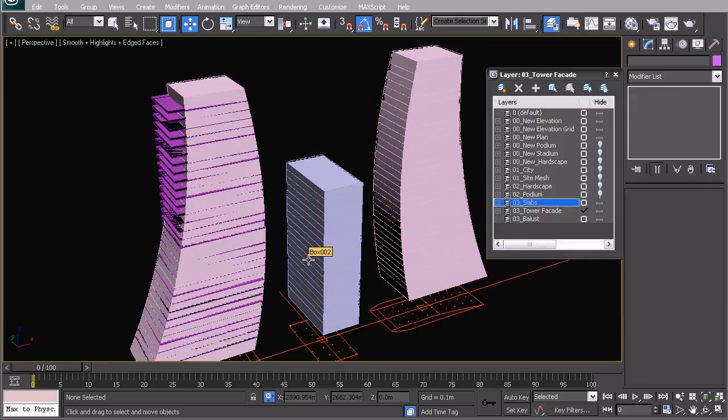So now that we've done the slabs and the balconies on one side, we're going to do the same thing to this building in the middle. In a way, this video is going to be a slight repetition of the last one. So you can skip through it if you feel really confident that you can do all of this quite easily. I'm just going to do it on camera so that you can see the entire process and I don't really skip through anything that's important. So we're going to do it quickly this time.

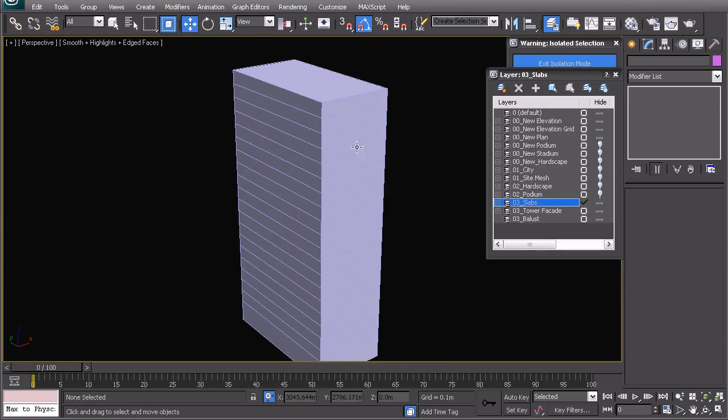I'm going to isolate, select all of the lines. I'm going to select a loop. We're going to create a shape. The only difference is this time the shape is going to be slightly on the outside, so we're going to add balconies to each of these levels. I think it's about 2 meters we can go. We can change that distance later as well if we like.

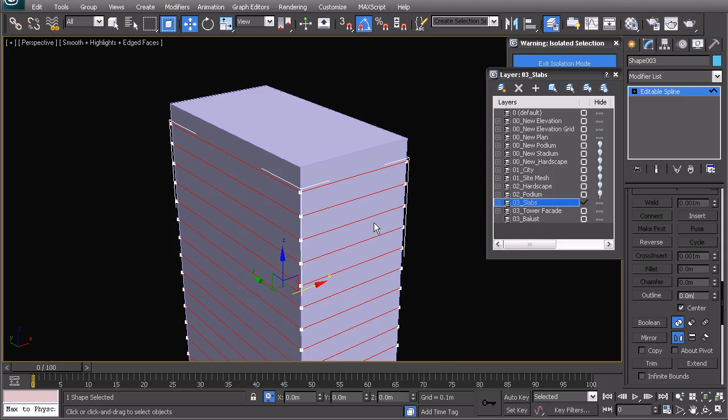There's two ways you can do this. You can either make the slab on the inside as one object and then the balcony on the outside as a separate object. And I'm going to do it that way. It's slightly more complex, but I'll show you why we have much more flexibility that way. So what we're going to do, let's isolate. Just go back down, re-isolate. There we go. We're going to extrude minus 0.25 without the capping.

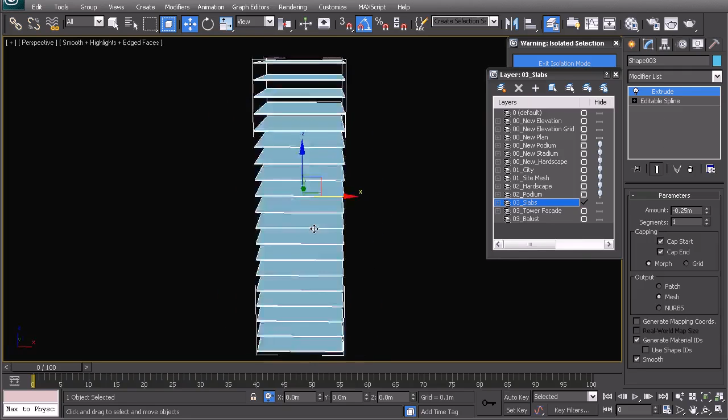Let's just see what happens if we do cap it. You'll see this time the capping worked without any problem because none of these outlines were facing in the wrong direction. Otherwise we'd have to do it the same way we did last time when we ran into that little bug. So what I'm going to do to make the balcony stick out on the other side is I'm going to make a copy of this by pressing Ctrl V, and instead of extrude I'm going to do a sweep.

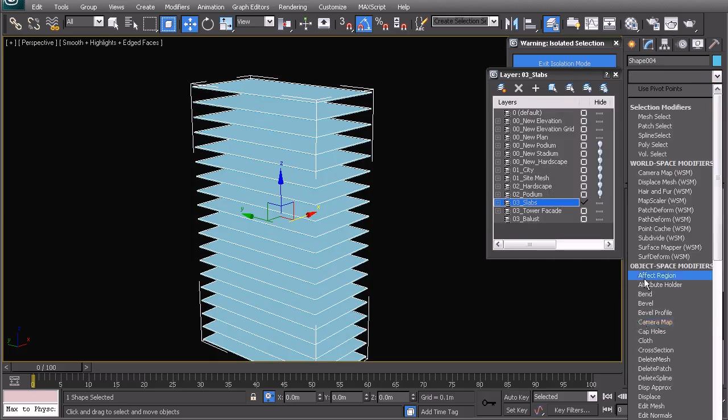Now let's zoom in here so we can see what's going on. The sweep is going to have a bar, so that's correct. Then the distance here we will align it slightly differently so it's in the opposite corner. And this distance here is the depth, so we're going to do 0.25, so it's the same as the balcony, same as the slab. And then this part here is going to be the width.

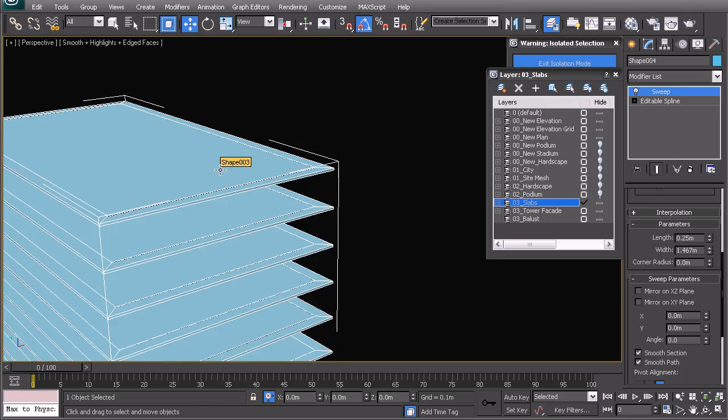And the reason why this is fantastic is with one parameter being this width figure here, we can adjust the width of the entire balcony on the whole building. So that is much better than going back into editable spline, then creating an outline and doing it that way. So this way we don't touch the slabs on the inside, we're just focusing on the lines on the outside. So let's say we're going to choose 2 meters.

We can then go to the step where we want to make the balustrades. Now we can do it two ways. Either we can add an edit poly modifier and then select all the edges and then create a shape out of that, or we can use the same shape, press Ctrl V, copy, go back down to the editable spline level, and here we will have to use that outline command. So here we can use an outline by a positive 2 meters.

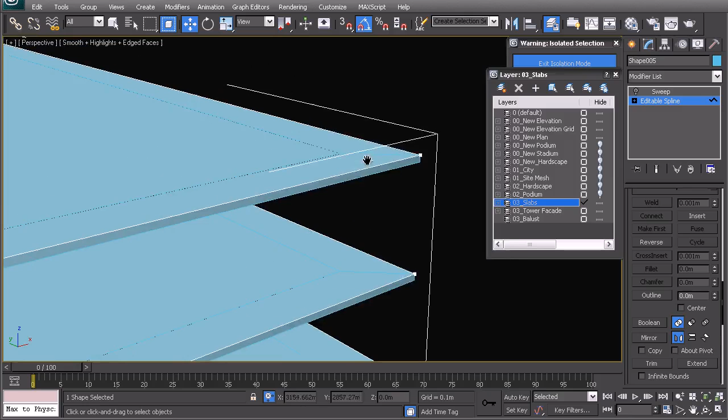So let's just type in 2 here. Let's just do that again quickly. 2 meters and enter. And we're going to delete that inner line. So now we're left with the outer line here. So that sweep is now going to be a different sweep. We don't want to sweep outwards. We want to sweep up.

So we're going to change the direction first of all into this one right here. And I think that this is going to be the right one. So now the width of that balustrade, let's say we're going to be using glass or something thin. We could also just extrude it straight upwards. So I'm going to do it this way.

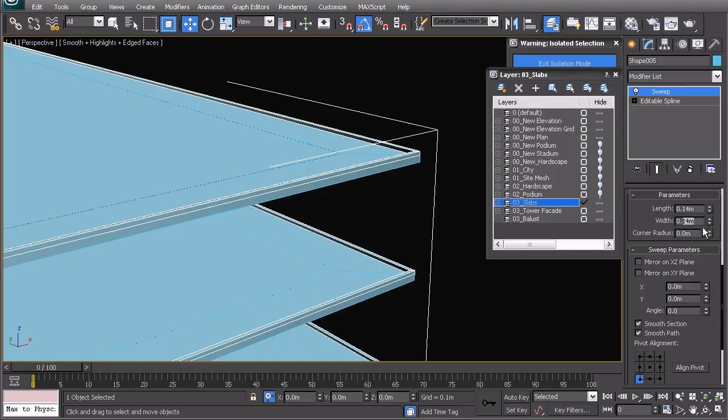0.01, so that's 1 centimeter for glass, and the length is going to be 1 meter high. So let's say this will be a glass balustrade or another material. So this sweep command is slightly different to what we did on the previous one where we only extruded it up. So here I want to go back and just see why we don't see these ones here.

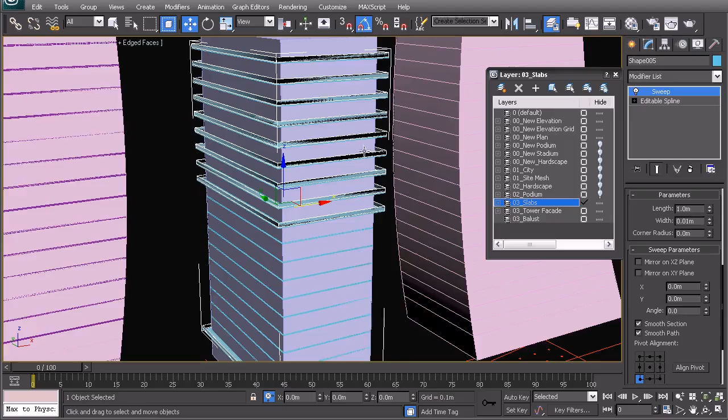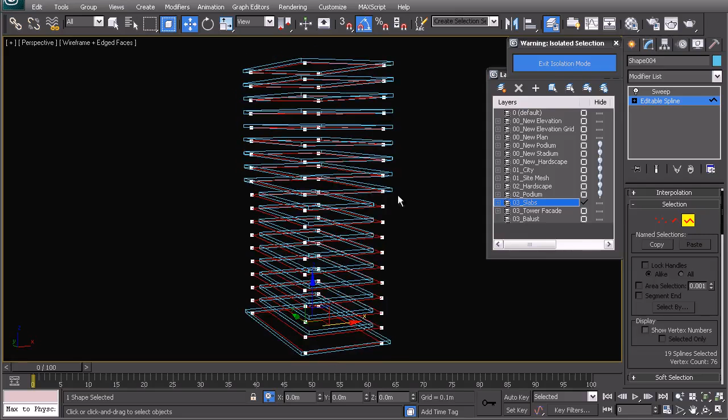And I think that we actually had an error that we didn't see because we didn't zoom out and we didn't have a look at it. The error here will be that these ones here are facing in the wrong direction. So you can see that they also have the balcony and balustrades, but they're actually facing inwards. So all we need to do there to fix that, we need to go down into editable spline, select number 3, which is your spline, and then just select the ones which are facing in the wrong direction, which is these guys here. Scroll down, click on reverse, and you should see that will correct itself.

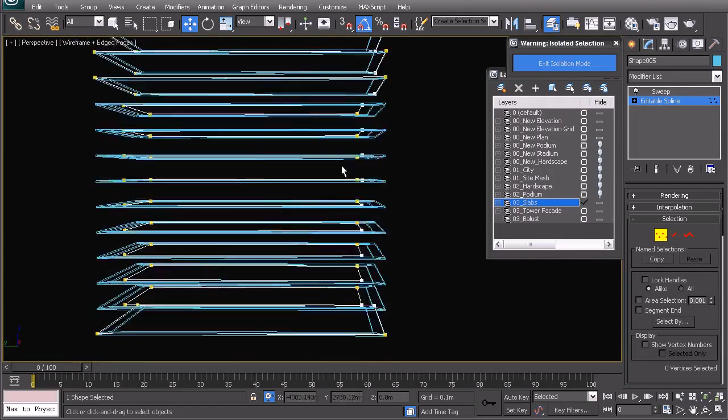Now these inversely facing splines are quite bothersome, so they do add a little bit of trickiness to the whole process. So what I'm doing now is I'm just manually going to move this out. We could also do another outline on these. Perhaps that is the quickest.

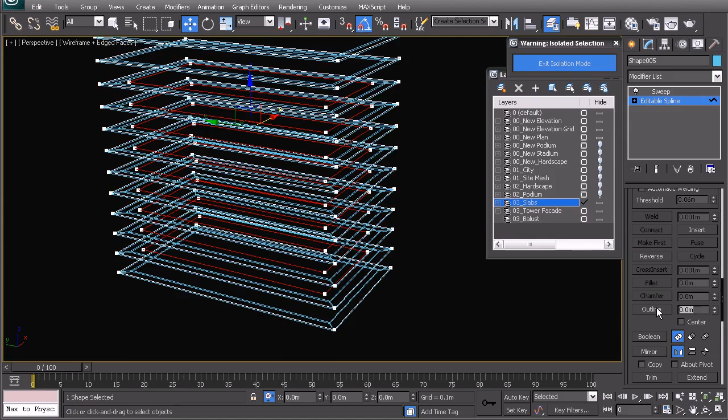Let's try doing an outline of 4 meters, and it has to be the opposite, so we have to reverse it first. So press reverse and then 4 meters again, so that it is in the right place. We delete on the keyboard, and we let go. So now all of those have been corrected. And if we do a zoom extents, you'll see that we have now all of these slabs in place.

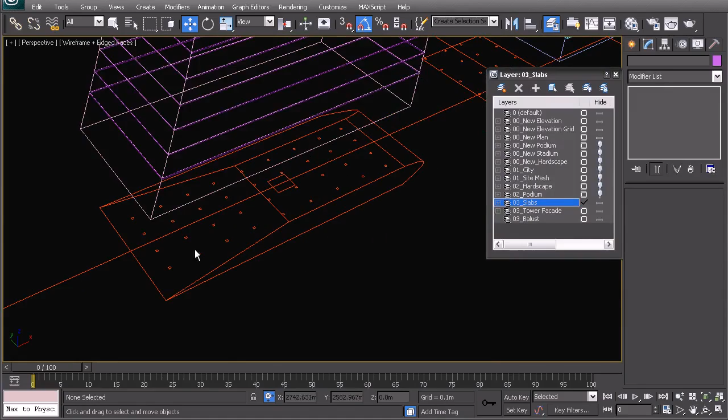So the last thing we're going to do before this video is over is we're just going to extrude up the columns. And just to keep things simple again, since that is the general theme, let's only extrude up the columns that we need. So let's go into plan view, and I'm going to start with this row here, and I will see if I need any more than that. Since most of the columns are going to be interior, I only really want to show the ones that are protruding outside of the building, holding up those extended balconies.

So I'm going to start with a rectangle, and I can actually start this on a new layer. So we can call that 03 columns, and we can, with the snap tool, snap the column in, and then holding down shift we can copy that and just make instances of these columns. I like to press spacebar just to lock down the object that I'm copying. So each time I do that and I repeat.

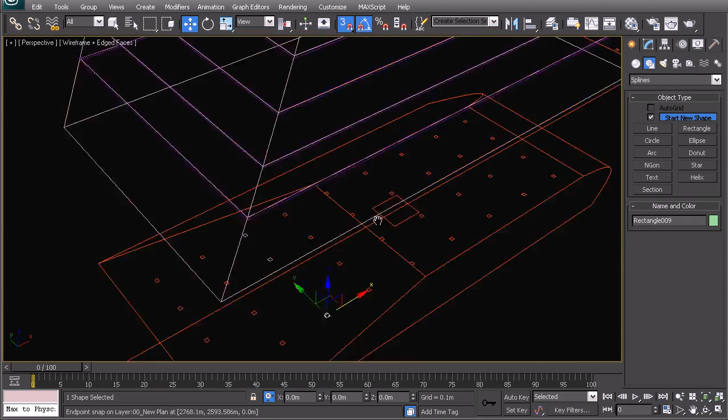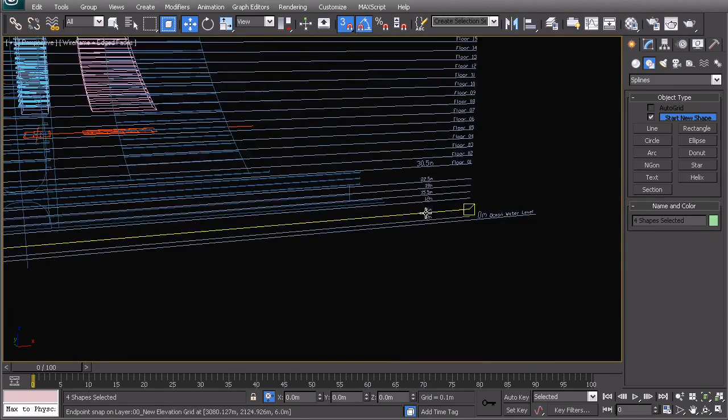So now I have these 4 columns all instanced, and I can go and move them up into the correct height. And I believe that correct height, just to remind us, is this 22.5, or actually we can start at 30.5. So we can move that up. 30.5. That's actually up here, so I think we have to go one level down. So let's drop that down to 22.5.

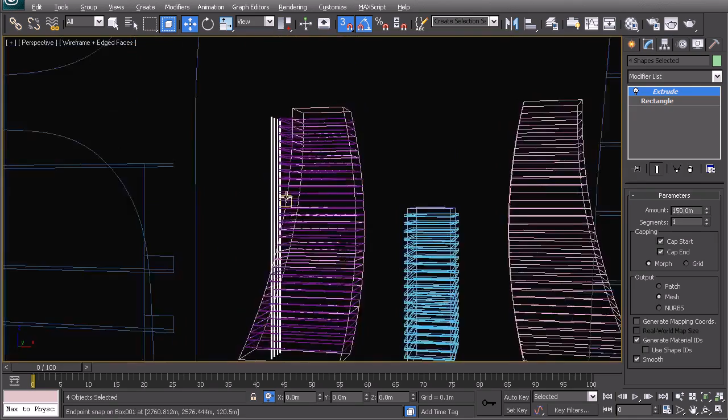Right, now we're going to extrude that up, so we're just going to add an extrude modifier. Let's say we'll go 150 meters. That'll shoot that straight up. And we can see that these columns are actually outside, so we need to move them one grid inwards. So pressing down the space bar, we can lock down that selection, and we can just, using the AutoCAD as our reference, move it across. And you'll see now that that line of columns now lines up and supports this line of balconies.

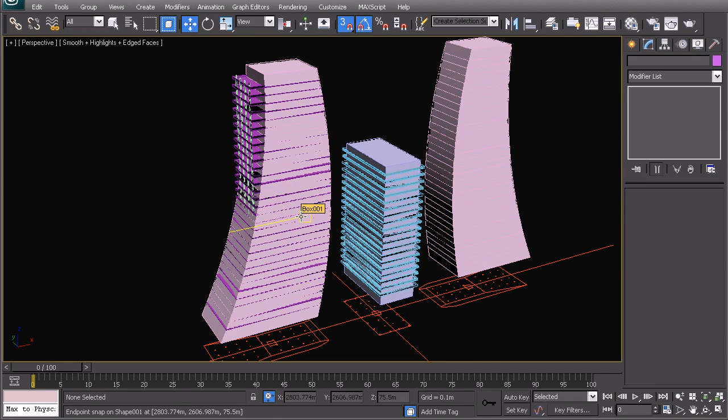And that is it for this video. What we've done is we've repeated the process of creating the slabs and the balustrades on this building, and we've gone and extruded up these columns on here. Now in the next video we will look at further detailing. We can go and do the columns to this building, and we can then also start looking at how we will start to make the main structure, which is here surrounding this building in the middle, holding up the eventual stadium, which we will build right at the end.